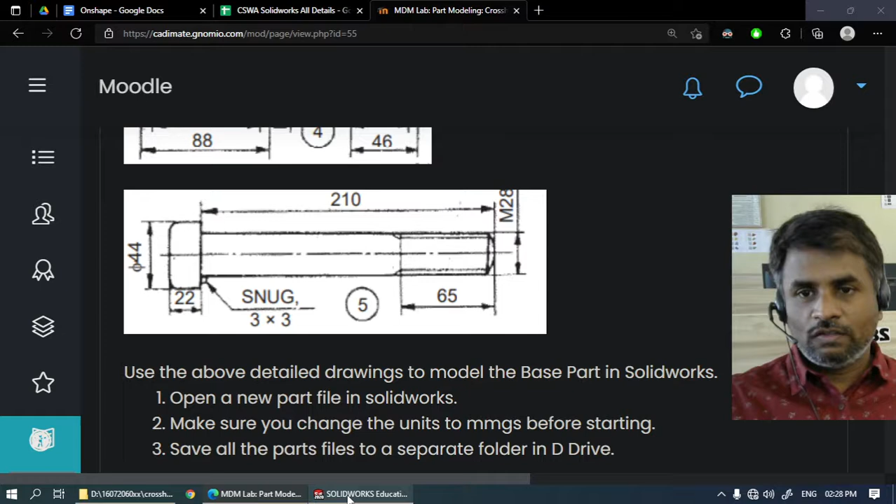We will also need nuts for fitting onto this bolt, and the diameter has been given as 28. Taking that size, we'll have to create the nuts. Let's go ahead and do that.

Take a new file. Let's ensure that the units are set in MMGS. Save the file in the same folder, CrossHead. This one will be saving as nut. Let's start modeling the nut.

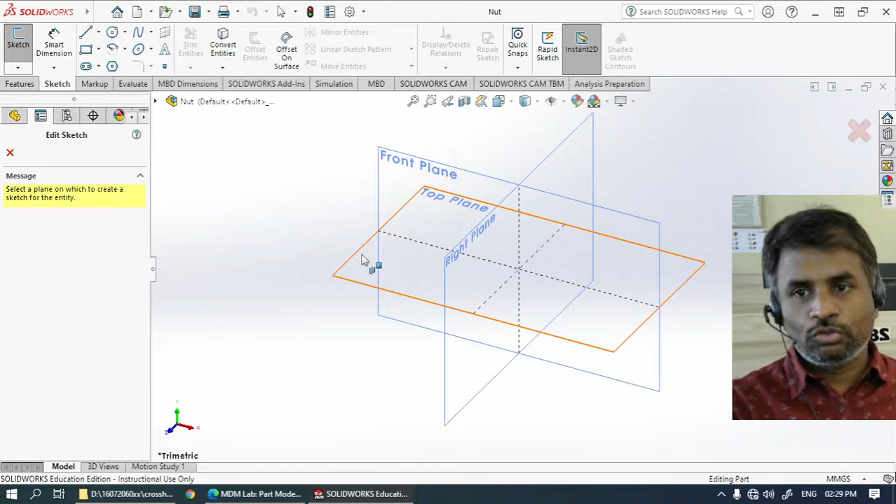Take sketch, choose top view, and take a circle of diameter 28.

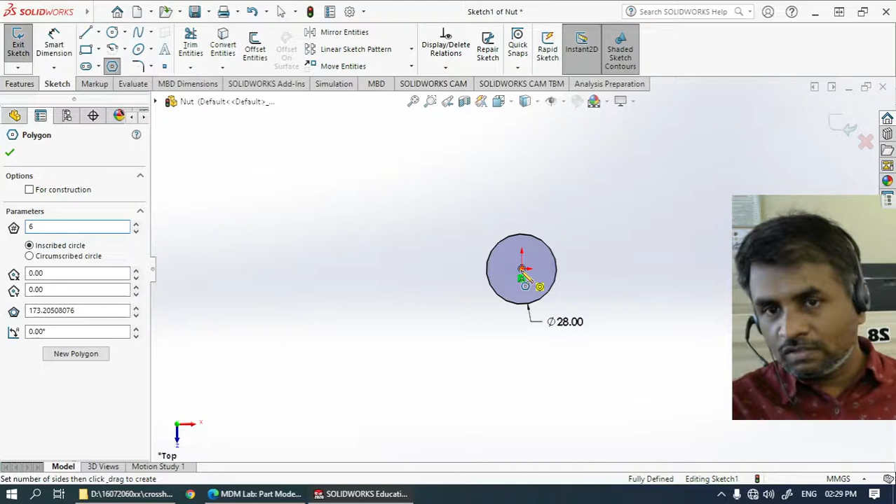Now we have to create a polygon, with number of sides 6, and let's take the center and drag it like this to create it. You can see the size we can change to what we want.

One of the sides we need to make horizontal, so select this, make it horizontal, and then the length of each edge we should make the same as the diameter.

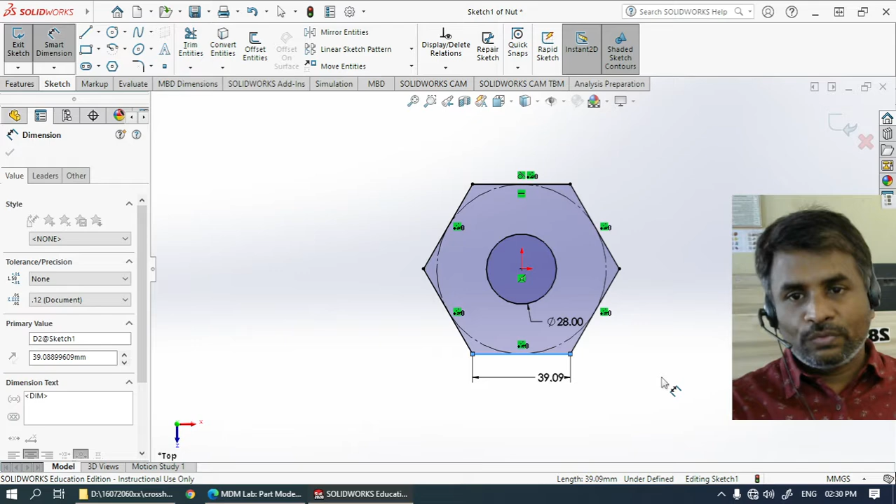You can see that the whole diagram has become black, which means we can go for feature extrude. Extrude thickness also has to be the same as the diameter, or in some cases we take 28, the diameter, into 0.8 or 0.75 as suitable.

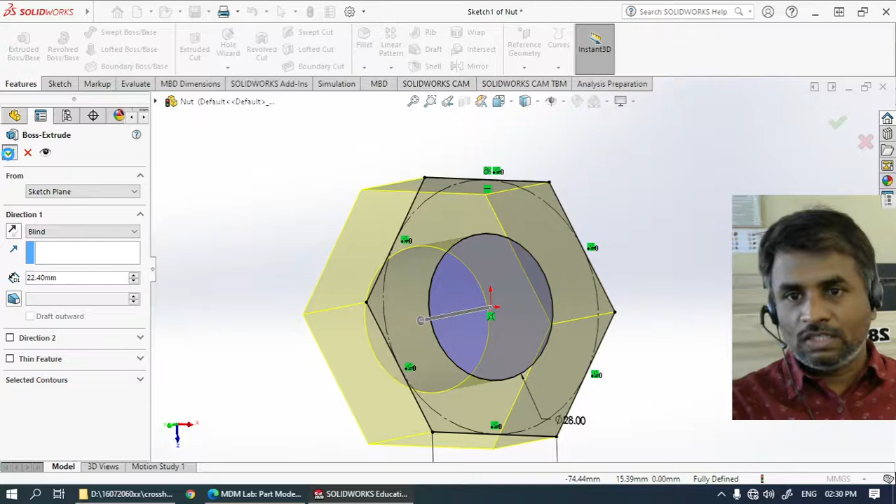So this is our nut. We just need to create chamfers on all the sides.

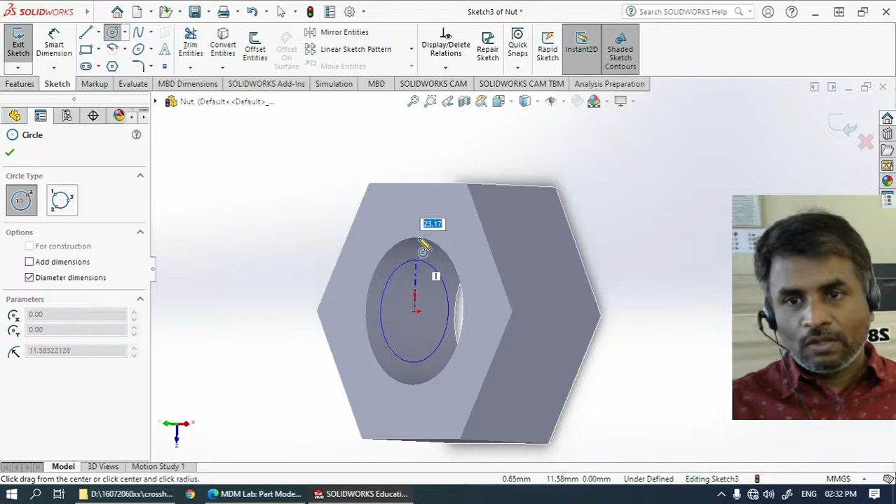So to create the chamfers, first we'll have to take a sketch on this face, and we need to draw a circle with the same center as this circle, and it should be tangential to one of the edges.

If tangent is not appearing in the first time itself, we will have to press escape, select the circle and one of the edges, or press control, and when the tangent option appears here, click on that. So the circle should be black, should be tangential to the edge.

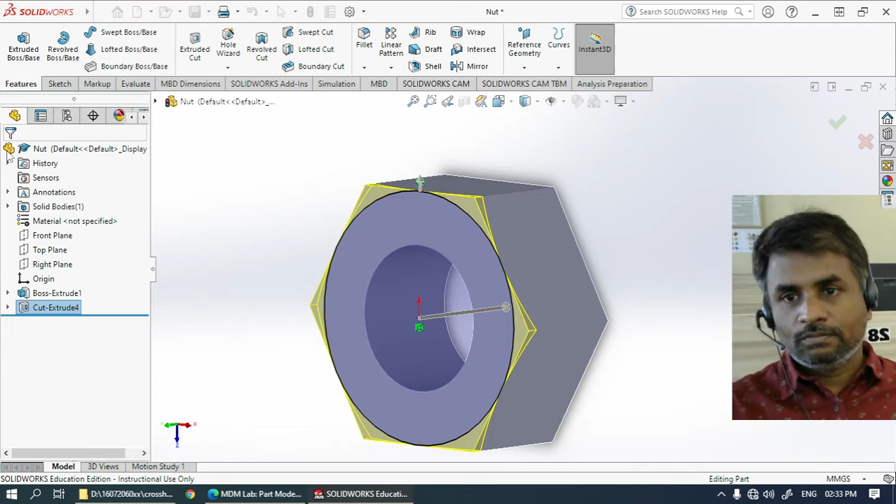After that, we'll have to go for features, extrude cut, flip the side to cut, and give the draft angle as 60. Click OK. That should create the chamfer.

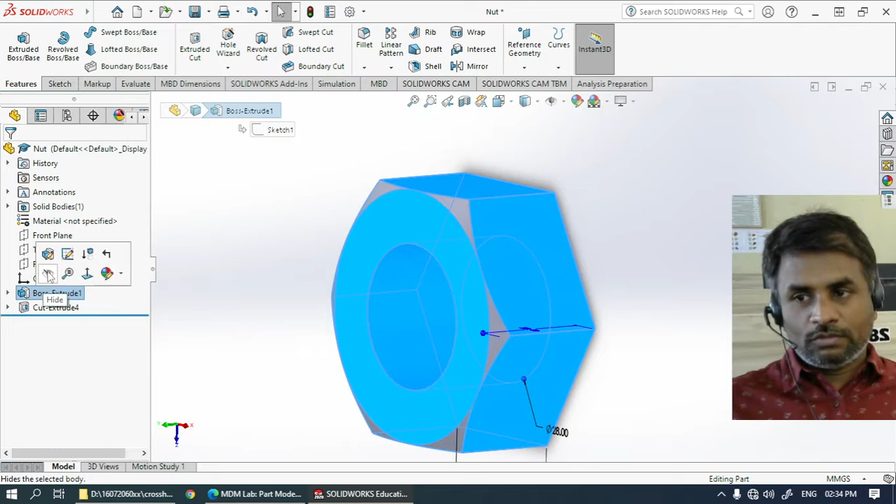Now we want the same chamfer on the other side, so we can either go ahead and create another circle and extrude cut, or we can use the mirror feature option with this. But if you want to use the mirror feature option, the first extrude needs to be done over the middle plane.

So instead of blind here, we'll have to go for mid plane. That will ensure that our top plane is going to appear exactly at the center. This top plane we can use for creating a mirror.

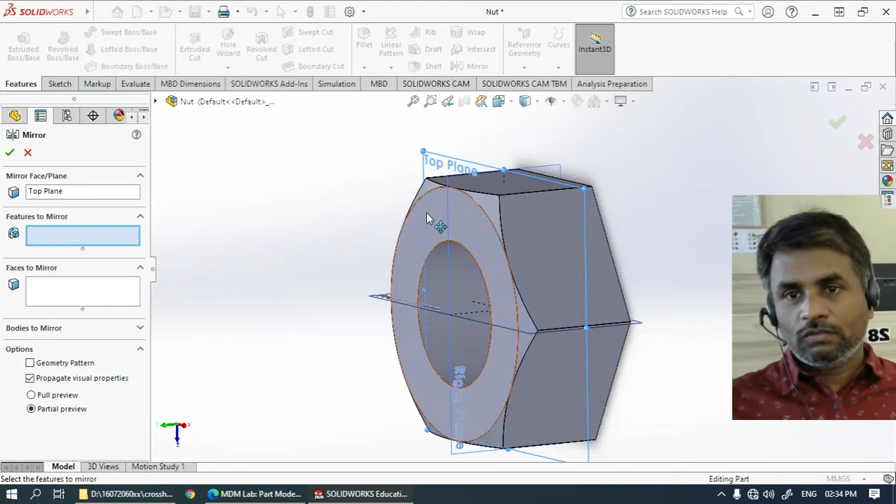So go for mirror, the plane, select top plane, features to be mirrored, select this chamfer feature over here, and click OK. You can see the chamfer is created on both sides. Just save it as a file, nut, and be done with it.